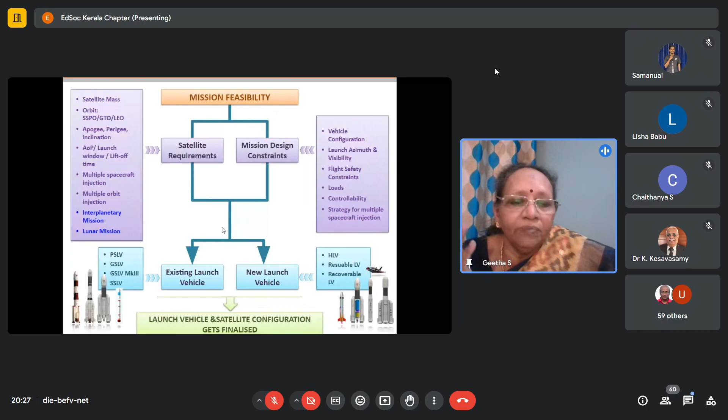In that, the major concern is the satellite mass. So the vehicle mass, satellite mass carrying capacity of the rocket will vary from vehicle to vehicle. That is the vehicle configuration. Then we will decide the launch azimuth and the visibility constraints - from which tracking stations the vehicle is visible, not only along the flying path but also in the orbit.

And also then the flight safety constraints, loads, what are the loads acting on the vehicle, whether the vehicle is controllable in all phases, and whether the strategy for multiple spacecraft injection is capable, that capability is there for the vehicle or not. For example, in the case of PSLV, we have to have PS4 restart capability. Then only we can have...

multiple restart option as well as the multiple orbit mission. In one flight itself, we can have multiple satellites, but if you wanted different orbits, for example, first satellite in an orbit of 650, next satellite in an orbit of 850, then we have to raise the orbit. That capability is due to the last fourth stage restart capability. So with these things into consideration, we'll go to the existing launch vehicle.

On the left side, you can see the existing launch vehicles of ISRO: PSLV, GSLV, Mark III, and SSLV. I am telling all these things with respect to the ISRO launch vehicle. On the right side, you can see HLV, which is coming in the new launch vehicle. Reusable launch vehicle is, at present, not designed to launch the satellite and all. It is an experiment only, and a recoverable launch vehicle. These are all new launch vehicles.

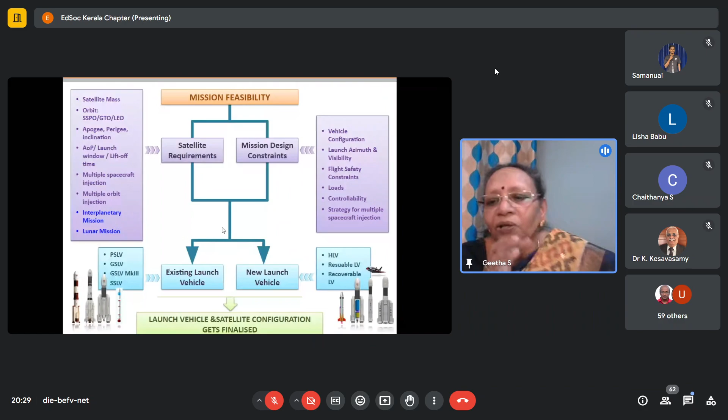This is one of the challenging areas, because suppose the vehicle is big enough, then we will be losing some money because of the cost of the vehicle. For example, for a small satellite, if I am using GSLV or GSLV Mark III, then it won't be cost effective. So cost part and all I am not addressing at all.

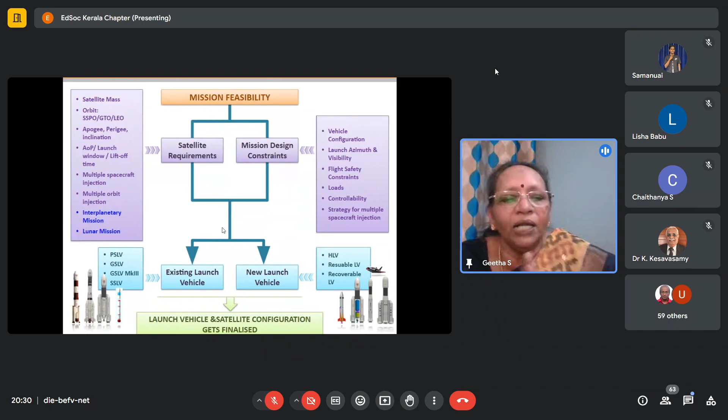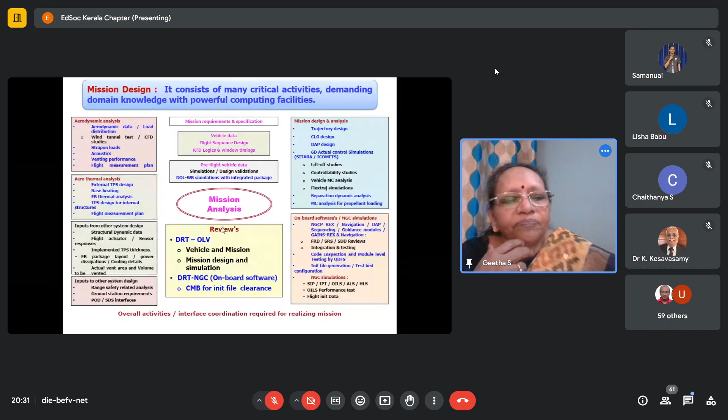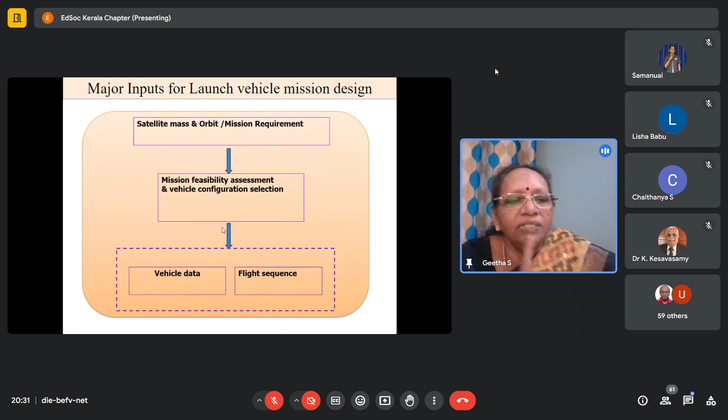So once this vehicle is finalized, satellite is finalized, then we'll go through the vehicle data. Once the feasibility and the configuration selection is over, then for the mission designer, two important points: one is the vehicle data and the next one is the flight sequence.

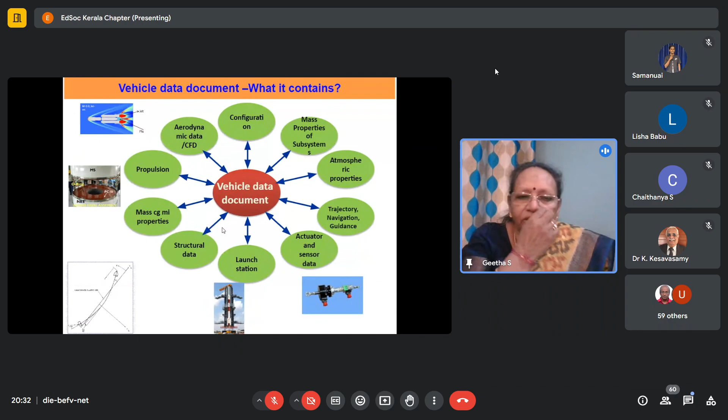So this document is the one which goes to the mission design. It is a huge document. These are the inputs to that document.

Like why I am telling mission constraint is, suppose visibility is there, then all important stage events like stage ignition, stage separations, stage control - all these things should be visible from the visibility stations. If it is not available from our own visibility stations, then we have to hire also.

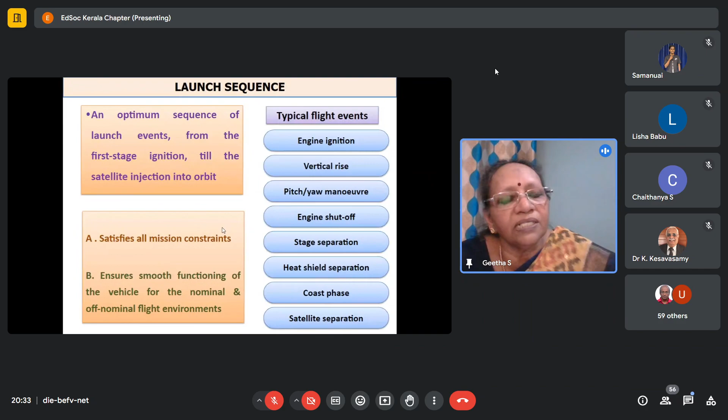Suppose there is a coast phase, no major events, no visibility - then we need not worry about hiring a visibility ground station. Rather, we can store the data. That satisfies all mission constraints. So even though I put it as ignition, cut off and all, visibility is also a major function, and it should ensure smooth functioning of the vehicle for nominal as well as off-nominal flight environments.

So that is another point. Launch sequence must satisfy vehicle and ground subsystem requirements which depend on flight environment. Defining the event sequence in real time onboard is essential to meet all requirements. That is called RTD. When we started with ASLV long back, RTD was not there. After the 2 failures, our study indicated that a real-time decision onboard is required. That is why RTD is implemented from ASLV D3 onwards.

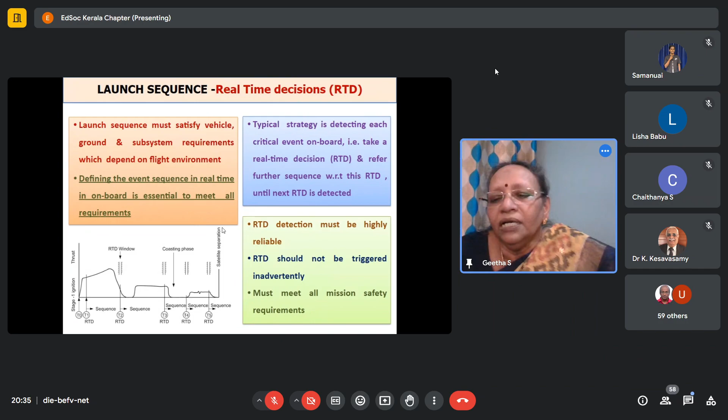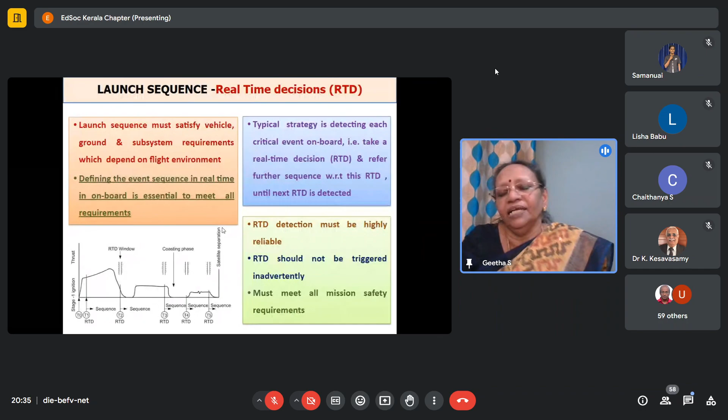So that is a typical strategy - detecting each critical event onboard, taking a real-time decision and referring further sequences with respect to that decision until the next RTD is detected. So RTD detection must be highly reliable. RTD may be based on sensor data, accelerometer data, so that has to be reliable, and RTD should not be triggered inadvertently. If an RTD is triggered inadvertently, that also creates a problem, and at the same time it should meet all mission safety requirements.

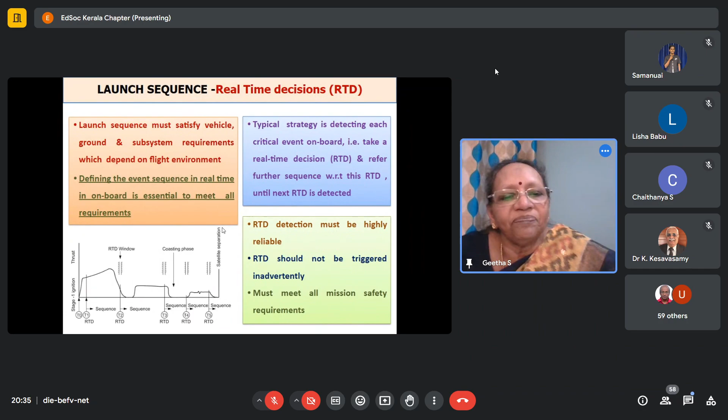So this is a typical sequence. I will not dwell upon that. This is to say a typical mission sequence wherein all separations, acceleration-based RTD, everything is noted for these 3 stages.

Launch sequence - stage transition is a crucial event. There are 2 crucial requirements of stage transition. Stage transition means, as soon as the function of a stage is over, it will be separated from the ongoing stage. That is to increase the acceleration levels, because if you are carrying dead mass, the acceleration will be less, and because of that the velocity will be less. So the upper stages have to have higher capacity - that is why we are separating.

So in a stage transition, since this is a major event in the sequence - first stage to second stage to third stage to fourth stage - it has to be a clean separation. At the same time, whichever stage it may be, it has to be in controllable conditions. So the thrust of the spent stage must be low for clean separation. Solid motors and liquid engines may have large dispersions in action time. Only after separation of the stage can the next stage be ignited. So this is the condition for clean separation.

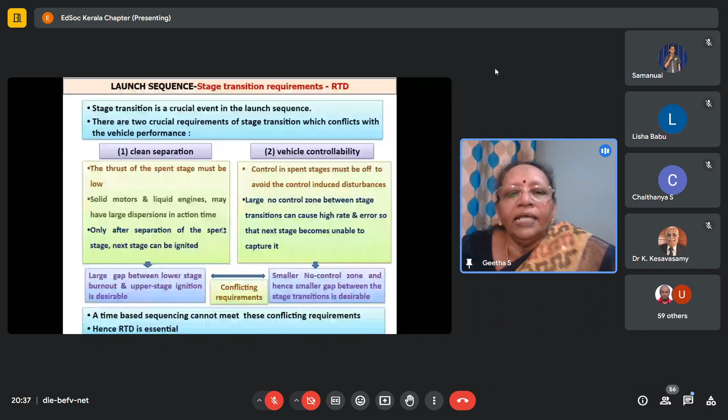The other requirement is control in the spent stages must be off to avoid control-induced disturbances. And a large no-control zone between the stage transitions can cause high rate and error, so that the next stage becomes unable to capture it. So these are conflicting requirements - that is why an RTD is essential.

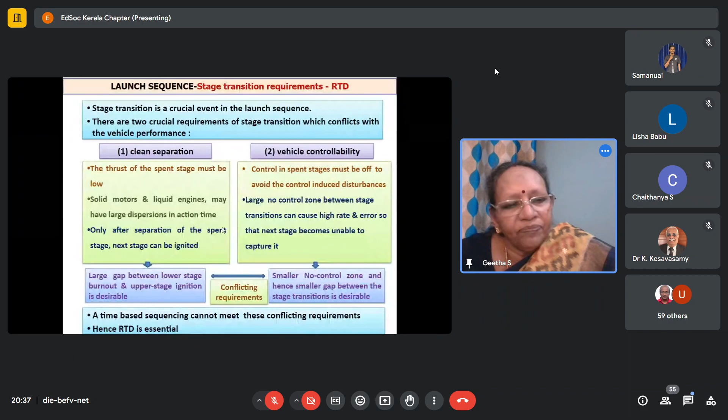So for a mission designer, the major challenge is getting vehicle data which exactly duplicates the vehicle behavior. The next is the sequence of events satisfying all constraints with clean separation and all. After maybe two or three trials, both the vehicle data and the sequence will be evolving. Even for PSLV and others, we are at a stage where no further evolvement is required until there are changes.

So for the mission designer, now you have the vehicle data as well as the sequence. Then what is the challenge? The challenge is first of all the modeling of the vehicle and the satellite - because you work on the model only for the design, so the model has to be accurate with respect to the actual vehicle, then only your design will work. That is the first and foremost challenge in vehicle design - the modeling of the vehicle as well as the satellite. Even though I say vehicle, the satellite is also there - its properties also govern the mass, inertia properties, flexible properties, everywhere.

Then comes the mission aspects like trajectory, navigation, guidance, and control. Below each bubble I have put - for trajectory, it has to be a minimum fuel trajectory, meaning it is an optimum fuel trajectory. Why optimum means?

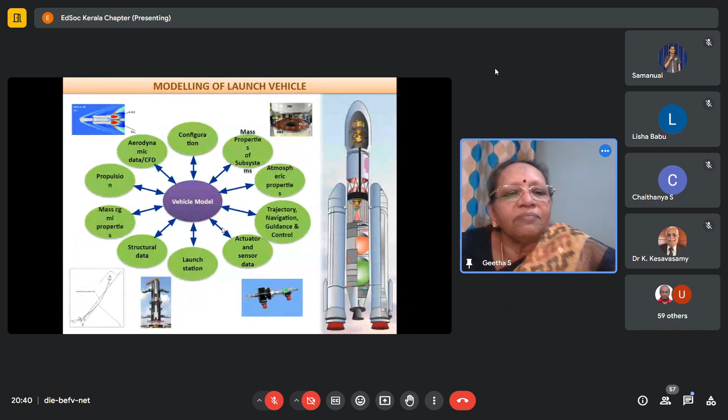Modeling I have already covered.

What is the mission design? In the mission design, as I told, the launch vehicle configuration is finalized. Then how to achieve the mission - that is the defined mission in specifications in terms of orbit and orbital dispersions. And the trajectory to be followed with minimum fuel - that is called the trajectory design. How to ensure impact of jettisoned stages in the safe zone - that is the range safety. And how to ensure safety of the vehicle during atmospheric flight - that is the load reduction or wind biasing. So this is the mission design process.

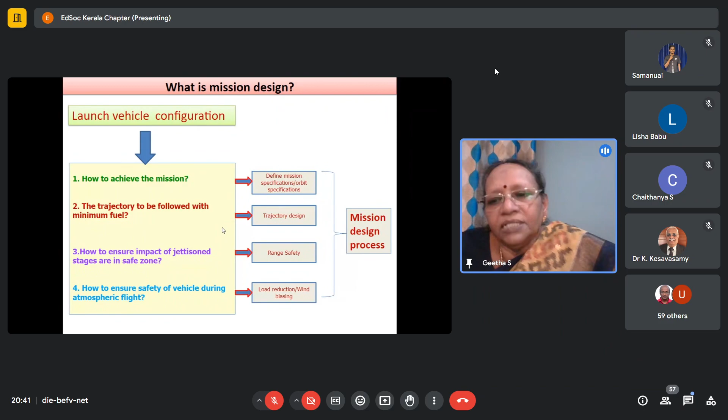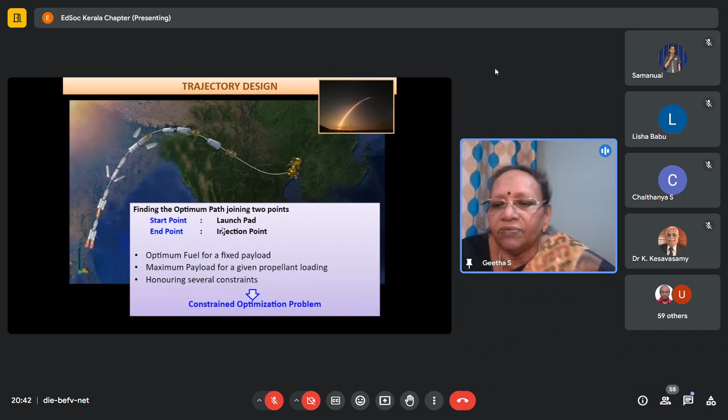This is the optimal trajectory design. This figure is for the Mark 3 vehicle. You can see the start point is the launch pad and the end point is the injection point. The optimum fuel for a fixed payload, or maximum payload for a given propellant loading, honoring several constraints - that is called the constrained optimization problem. Here we will be using the point mass trajectory, and a trajectory which meets our constraints in terms of visibility, range safety, and the orbital constraints. Then we will assume that this is the trajectory given for the guidance design as well as for the autopilot design.

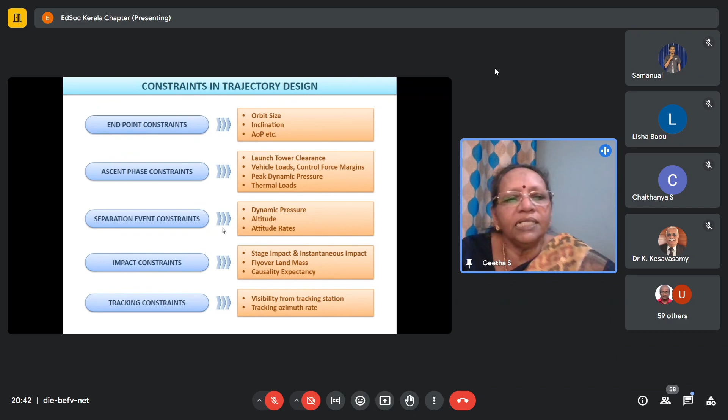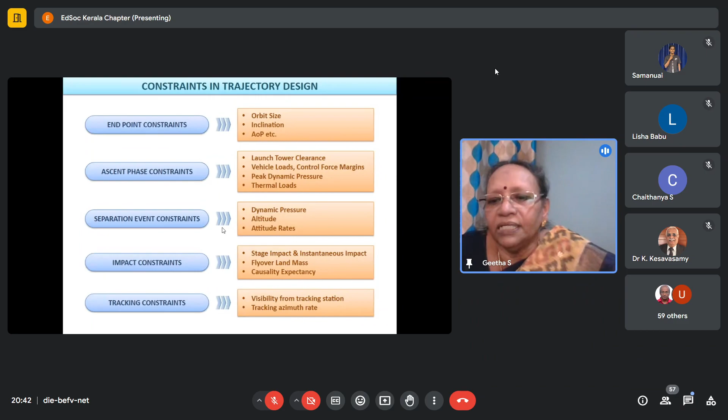This point, in a nutshell, I have covered earlier. Endpoint constraints - what are they? Like orbit size, inclination, argument of perigee, ascent phase constraints, launch tower clearance, peak dynamic pressure, thermal loads, separation event constraints like dynamic pressure, altitude, impact constraints, tracking constraints. All these things will be considered in the optimal trajectory design.

These are the different phases of the trajectory. You can see the first stage, and this is for PSLV - the 4 strap-on separations, 2 strap-on separations. I'm going through from down to up. Then PS1 separation, PS2 ignition, heat shield separation, PS2 separation, and the CLG phase is the closed loop guidance phase.

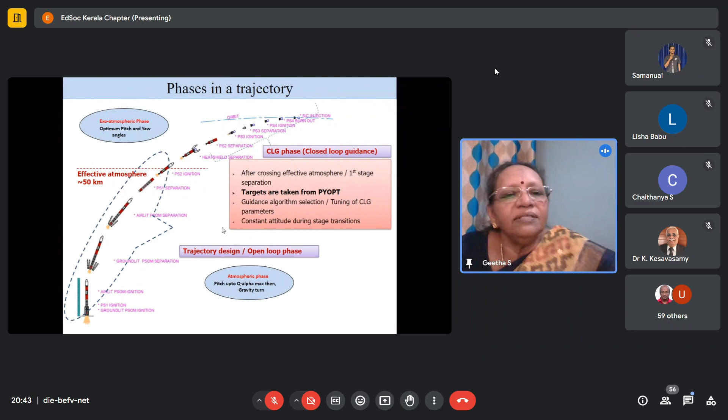That is only if the vehicle is not functioning properly - it has to be destroyed. Before the design phase, even if everything is working, at any point of time if the stage or vehicle - this destruction can happen only up to second stage - so at any point of time, if something happens to the vehicle and it impacts the ground, whether it is a populated area, what is the casualty expectancy - worldwide numbers are there. The impact point casualty expectancy has to be like this. Stage impact point has to be this many nautical miles away from landmass as well as ocean. These constraints are given to the mission designer, and keeping that into consideration, he'll design the trajectory.

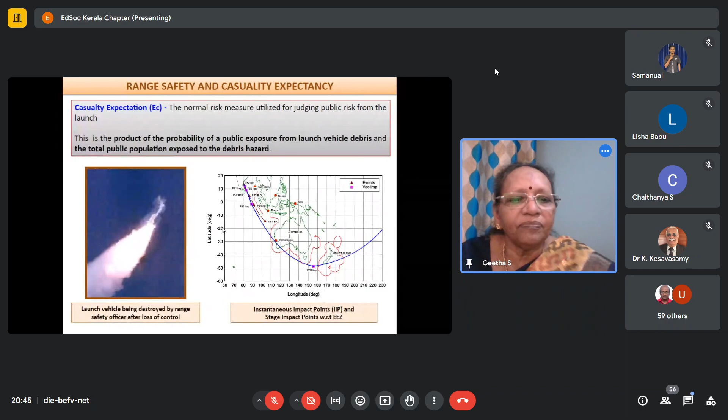Once the trajectory is over, the next point is navigation, guidance, and control. Navigation determines the present state of the vehicle: position, velocity, attitude. Guidance generates the steering commands to reach the desired optimum conditions, like orbital conditions.

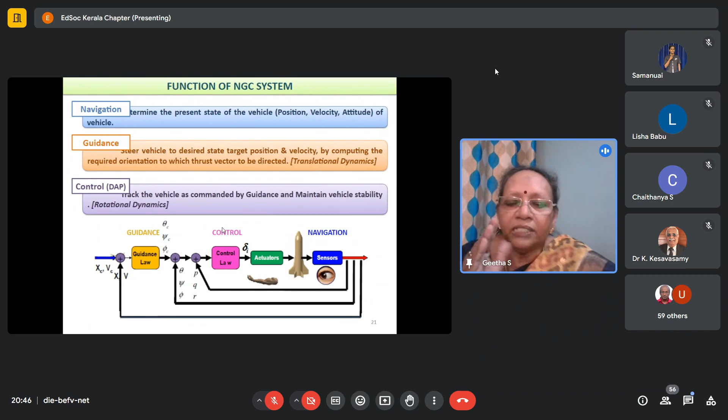In each stage there are targets. Suppose I am in the second stage, we will have the second stage target condition. Suppose I am in the third stage, we have the third stage target condition. So the guidance design has to be carried out to meet the end conditions in that stage, and the control has to follow the steering commands generated by the guidance.

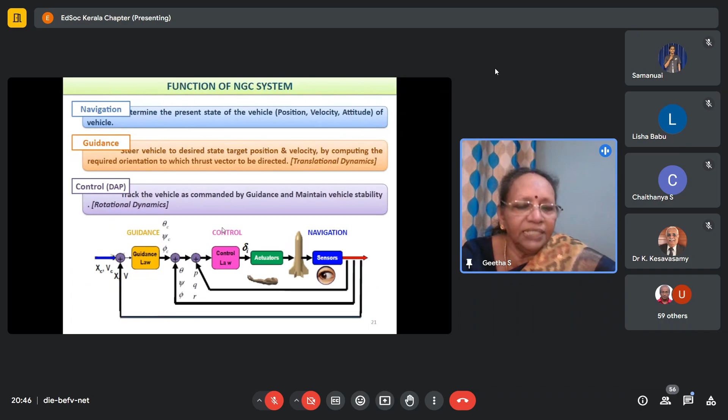So guidance generates the commands, navigation gives you information, and control gives you the steering commands, the actuator commands, required in each stage to meet the steering commands generated by the guidance.

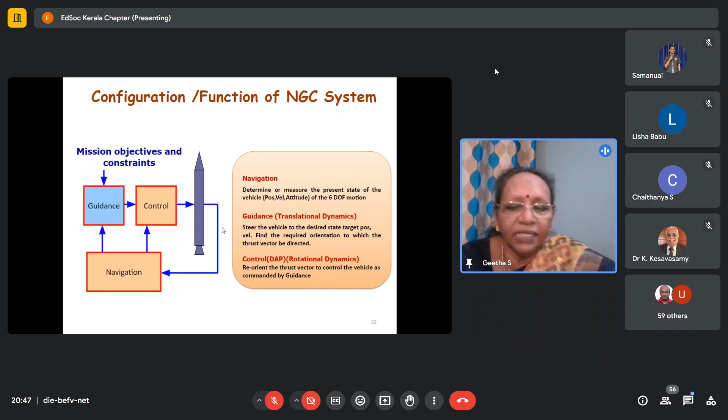I'll skip this because I already told what are the requirements coming from the satellite, whether low Earth orbit, sun synchronous orbit, or geosynchronous orbit. All these are inputs to the mission designer initially, and based on that we do the trajectory design as well as the guidance design.

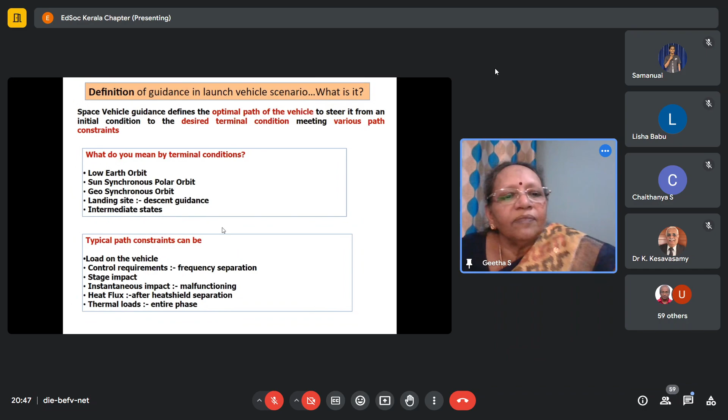In guidance design, the atmospheric phase is open loop and the exo-atmospheric phase is closed loop. In the atmospheric phase there are so many disturbances like wind, atmospheric pressure, atmospheric density and so on. There we give more importance to clearance of the atmosphere without any problem to the vehicle. That's why we use open loop guidance.

You can have closed loop guidance also, no issue. But the effectiveness matters in closed loop guidance. It won't be effective because our prime idea is to have clearance of the atmosphere. So in closed loop guidance, if you are having...

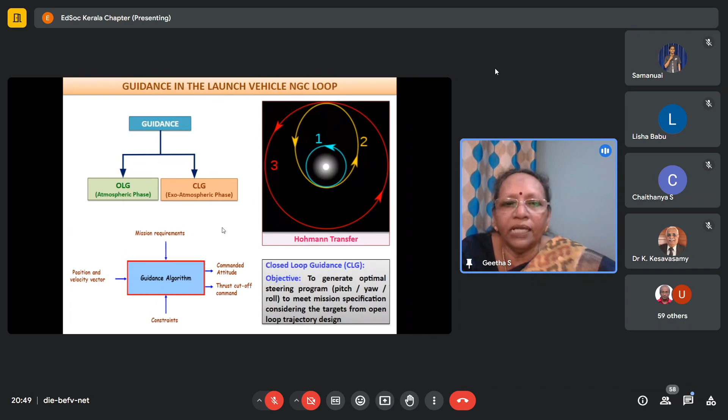From the first orbit, by using the satellite fuel, you can go to the second orbit. But here, after injecting the first satellite in the first orbit, the rest of the vehicle is reignited to reach the second orbit and then the third orbit. So in this case there are two satellites, one in orbit number 1 and another in orbit number 3.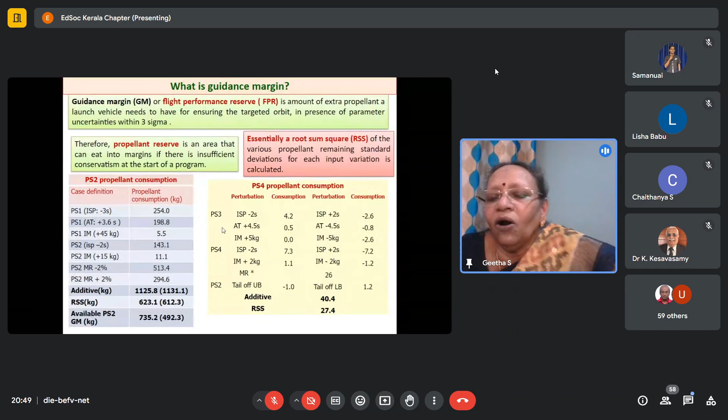I put this slide specifically because later I will be telling about the guidance margin. Guidance margin is the additional fuel we keep in each stage to meet requirements in the eventuality of the performance going off-nominal. So some additional extra fuel has to be stored in each stage.

Usually this additional fuel can be stored only in liquid stages, because in solid stages we cannot store extra fuel. In liquid stages we have the capability to shut down the stage, keeping some fuel in reserve, which we can use for off-nominal performance of the vehicle.

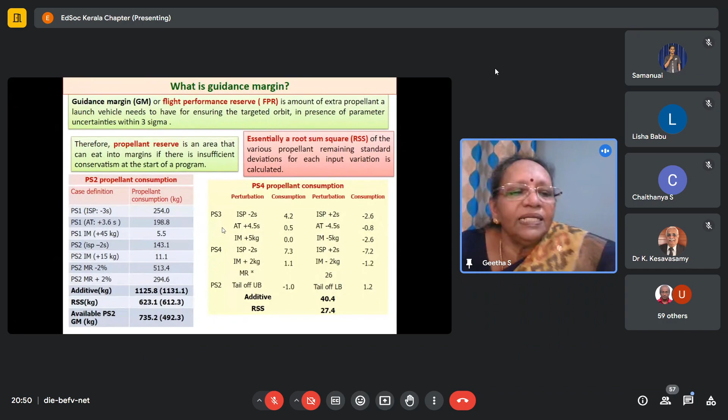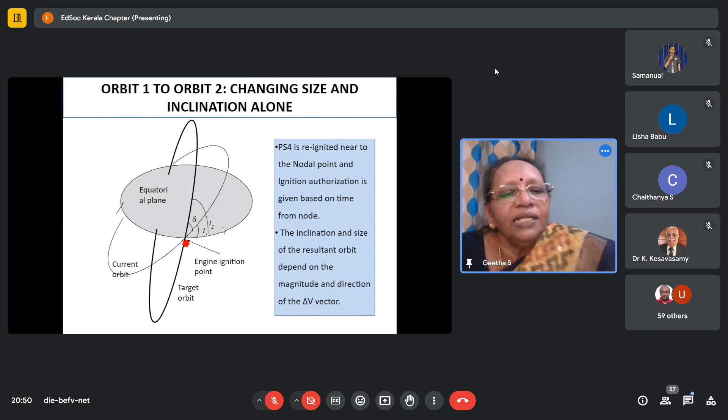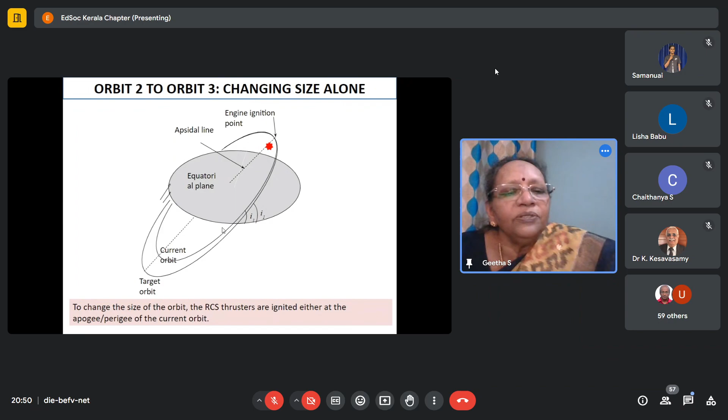This is from orbit 2 to orbit 3. All these come in the guidance part.

In the case of the PSLV C45 mission, we have 3 orbits. First orbit is 748 something, second orbit is 504, orbit 3 is 485. Orbit 1 is achieved with the regular launch vehicle phase. Then the PS4 engine is restarted twice to achieve orbit 2 from orbit 1. And then for orbit 3, we have used the RCS, the small thrusters, for a long time to reach orbit 3.

These stars and all, I have put, when you press enter it will click. That's why I was telling that I am comfortable with my own way of presentation.

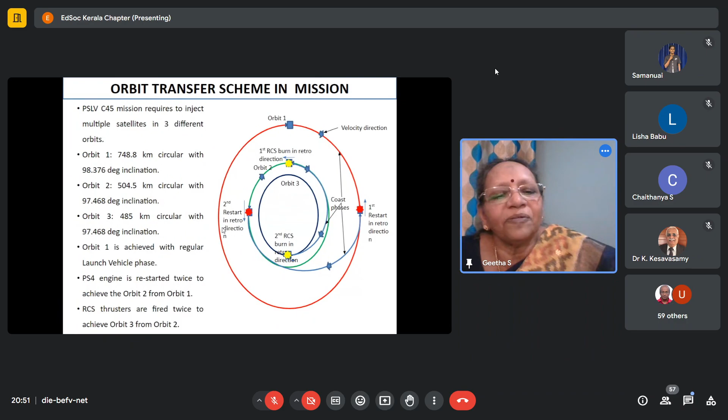Coming to the digital autopilot design, as I told you, the guidance will generate the steering commands in pitch and yaw direction. Almost all our vehicles have pitch and yaw only steering; roll control is not there for the vehicle. There are phases where rolling is required, like spin stabilized vehicles - the ASLV last stage is a spin stabilized vehicle, and some satellites are also spin stabilized.

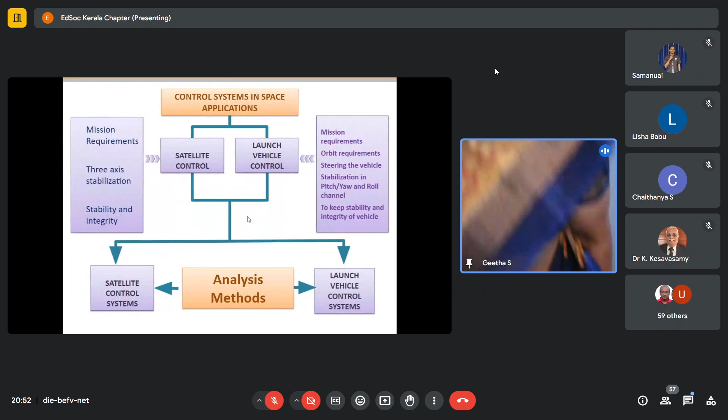Next slide. I think a battery is low coming from your presentation. Somebody who is presenting, you just see your battery is low.

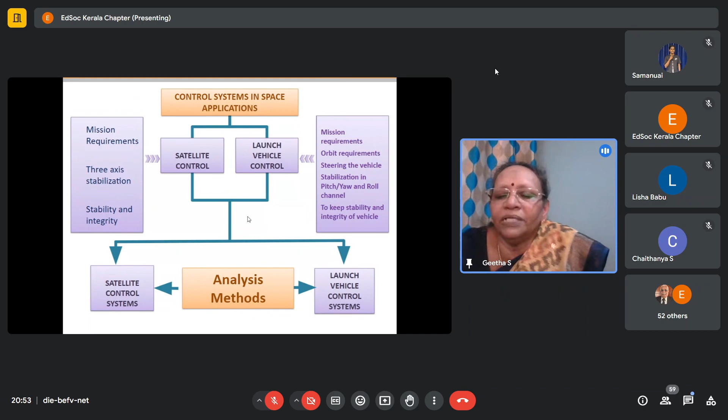This control systems in space applications has two controls: satellite control and launch vehicle control. The mission requirements for launch vehicle already I have covered, and then analysis methods. These analysis methods depend upon the launch vehicle and satellites, which will be different, because the launch vehicle is a huge structure, whereas the satellite is maximum, our satellites contain something like 4,000, less than 4,000 in the case of Chandrayaan 3 also. So the control systems also will be different. Once you are in orbit in the satellite, your control is required only to make it moving in the orbit, no other things.

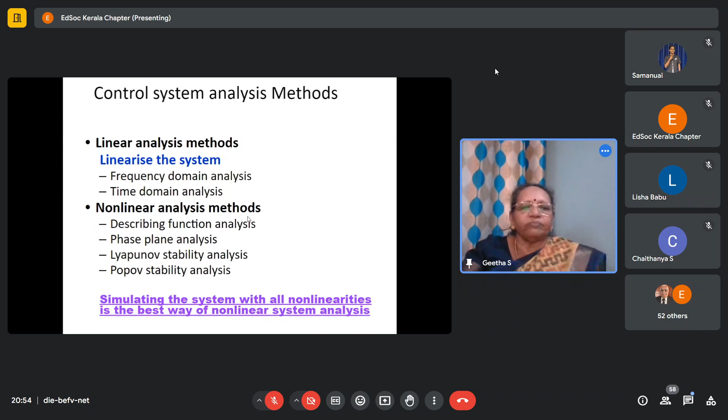This is also already covered - it is a feedback control problem. Delta input is given and the output is the vehicle attitude measurement in presence of disturbances.

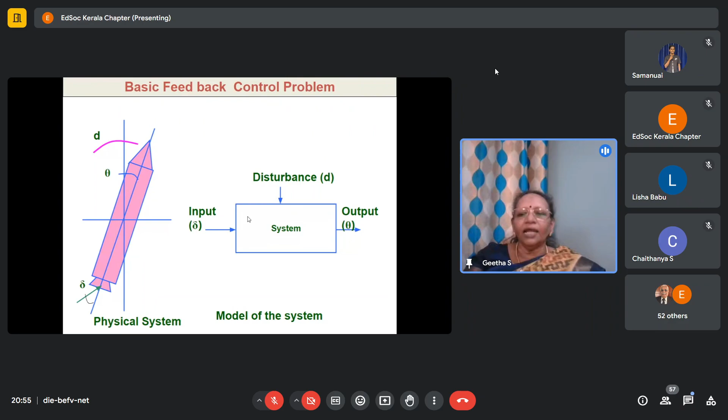So the controller design. After all these things, the controller has to be designed, which should take care of the varying vehicle properties - like when the propellant is consuming, the mass and CG properties will be varying, so each time the vehicle will be different. For that to work, what are the forward and feedback gains required in the rigid body? Rigid body means wherever the total vehicle is acting as a rigid condition - if you draw a line between two points during the entire phase of flight, the distance between those two points will not vary. Flexible means like a rubber band motion - it won't be exactly like a rubber band motion, but in flexibility we will be putting the vehicle in terms of flexible modes, like bending modes, which comes from the structural data.

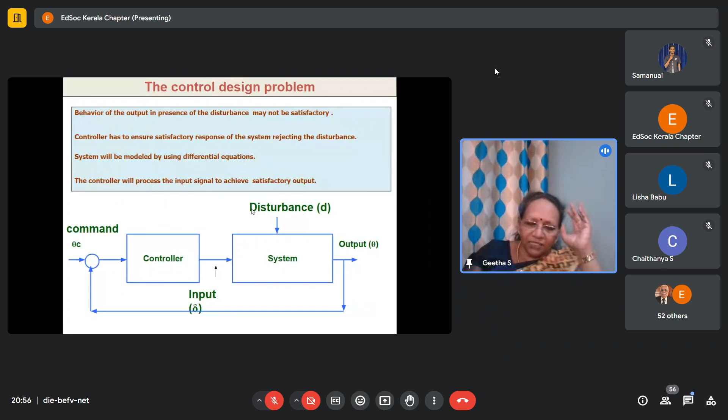With all these things, the controller has to be designed to take care of varying CG, moment of inertia properties of the vehicle, varying thrust of the vehicle, as well as the bending modes of the vehicle. If it is a stage with liquid engines and liquid tanks, then slosh properties also have to be considered.

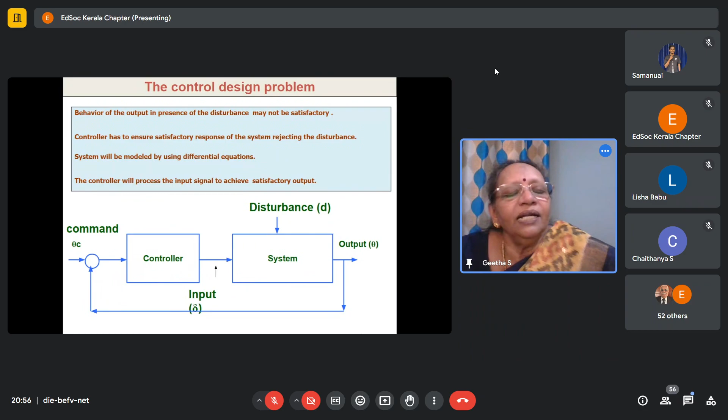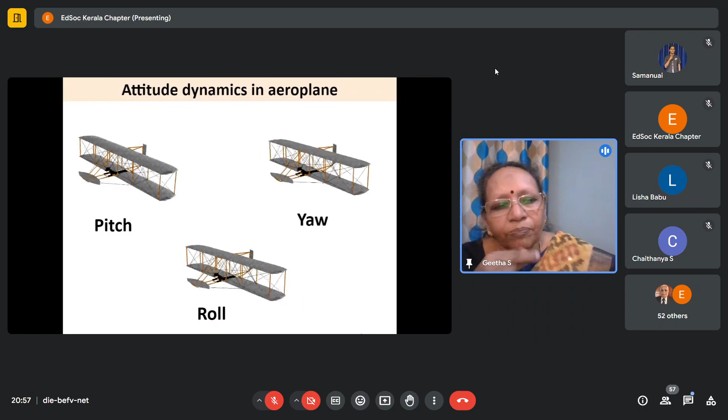Next slide - to have an idea of what is pitch motion, yaw motion and roll motion: pitch motion is vehicle up and down motion, yaw motion is like this, roll is as you know for any vehicle roll. In the rocket motion, pitch motion is very difficult to show, that is why I have put it as an aircraft.

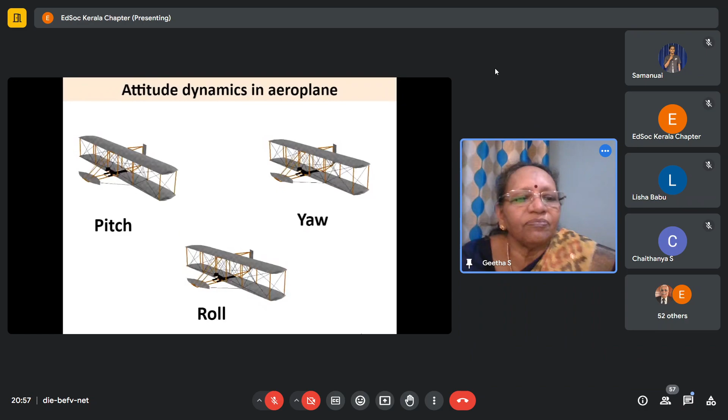Next slide. This is the pitch motion and roll motion. It cannot be shown like this for the rocket, that's why I have put it in the aircraft point of view.

So this is what I was telling about the bending modes. You can see the vehicle on the leftmost side and the bended diagrams of the vehicle with different modes, first mode, second mode and third mode. This is called flexibility. Slosh is happening for the vehicle which is having liquid tanks, and engine and actuator dynamics also has to be considered in the vehicle model.

In the original model, that model contains all these vehicle slosh effects, bending mode effects and all. And when you are doing the design for the GSLV first stage vehicle mode, you might have studied, being BTech, the state space representation of the vehicle, of the system. The order of the system is around 50th order, 50, 52 is the order size when we are designing the controller for the first stage of the GSLV rocket.

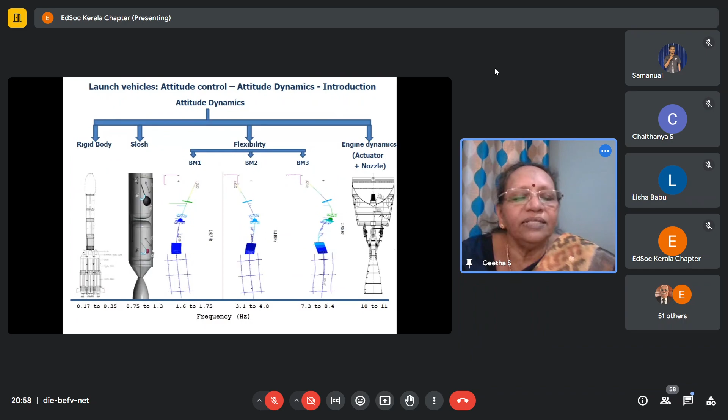These things I have already covered.

Electronics students might have studied about the Nyquist plot, I don't know. For the analysis, our major tool is the Nyquist plot. You might have seen the Bode plot too, first year or second year beginning. So the Nyquist plot shows the magnitude and phase with respect to frequency at any point of time. All these slosh modes or flexible modes are with respect to frequency only, so all our analysis is with respect to the frequency domain.

Finally, we will check with the time response analysis with all nonlinearities into the system in place, like dead zone nonlinearity, saturation nonlinearity, slew rate, what is the vehicle maximum actuator speed it can go to. All nonlinearities will be put in the simulation and we will assess the responses.

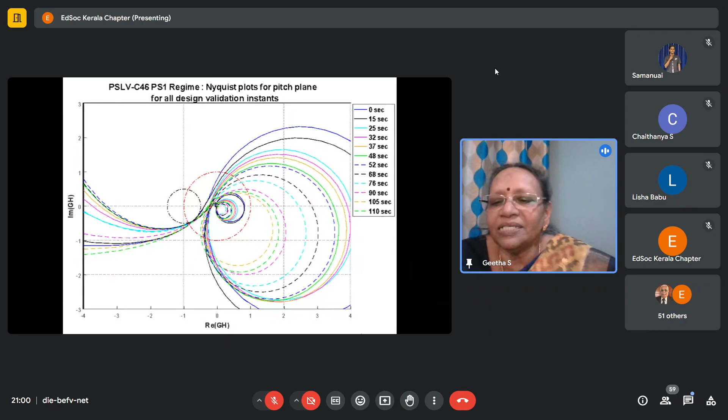You can see a small circle with the black, that is the region where it should not go. That is dictated by margins like gain margin, phase margin, aero margin, etc. And these modes which you are seeing on the right hand side are phase stabilized modes. I am not addressing phase stabilization and gain stabilization in detail, it will not be relevant to you.

Only thing is you have to see that all the vehicle modes, in terms of slosh or flexibility, has to be stable in flight. For that, a control designer has to do certain things.

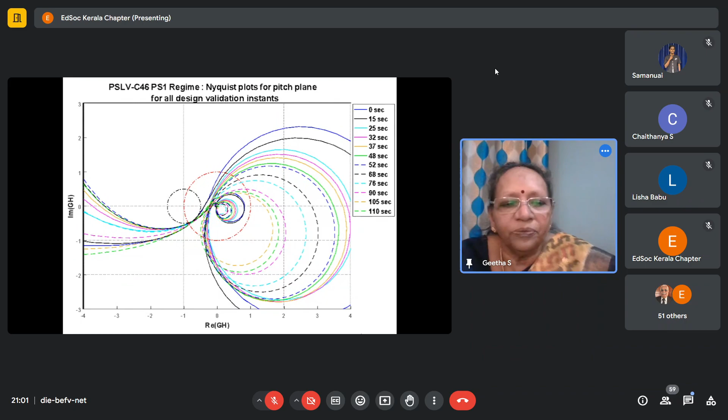So finally, autopilot design will consist of forward and feedback gains, a time varying gain, and then the integrator to reduce the tracking error, filters to stabilize the flexibility and slosh and attenuate the high frequency noise. All these things have to come in the design, in the autopilot design.

Here you can see, on the left hand side bottom corner, a lag lead to start with. This is frequency versus magnitude in the top plot, frequency versus phase in the bottom plot. You can see notch filters, two notch filters that I have marked as 3.56 and 9.3, those are their notch frequencies. And the first one, that is the lag lead.

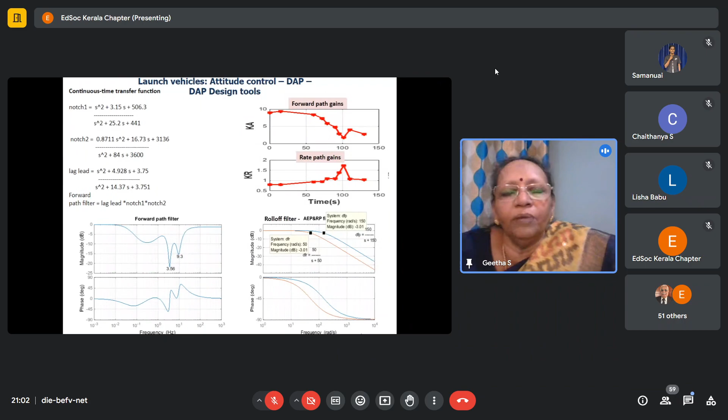The top red plot you can see is the time varying forward and feedback gains. And bottom right side corner, you can see roll off filters. So this entire thing will get into the onboard computer for the autopilot. Similarly, for the guidance also, a set of numbers will be there.

So here I have put a step response to show, on the right side, that red one is an unstable bending mode. That is why it is oscillating and going unstable, whereas you can see the rigid body is stable. So once you have all the filters in place with the correct design, you will have a response like the bottom, green one.

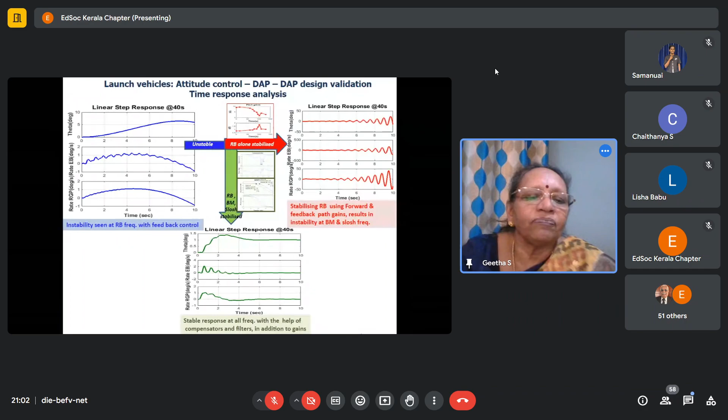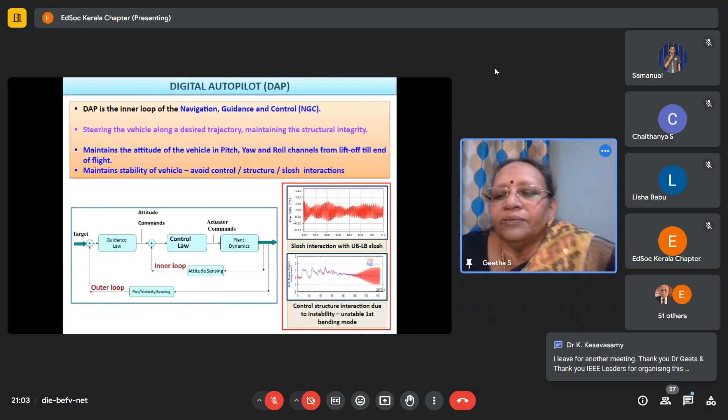So this top one is the control slosh interaction, and the bottom one is the control structure interaction. It is an unstable mode, the red one. In the inner plot you can see a small signal where it is a stable one. If the filter design would have been proper, it will behave like a stable response.

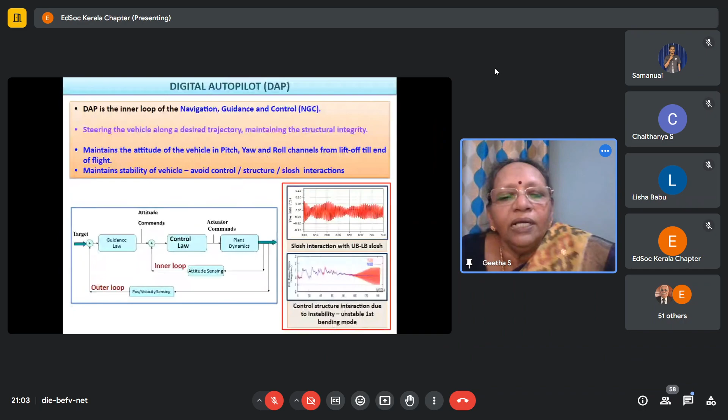Sometimes I may take some 15 minutes more. Is it a problem?

Okay. You can see this. Anantha Krishnan?

This plot also shows a stable one. What I have already shown in your Nyquist plot is the area wherein you should not enter, that black circle. When it enters, the figure will be like this top, that oscillatory red one, which is showing a divergence. When your design is proper, like a blue circle, the behavior will be like this.

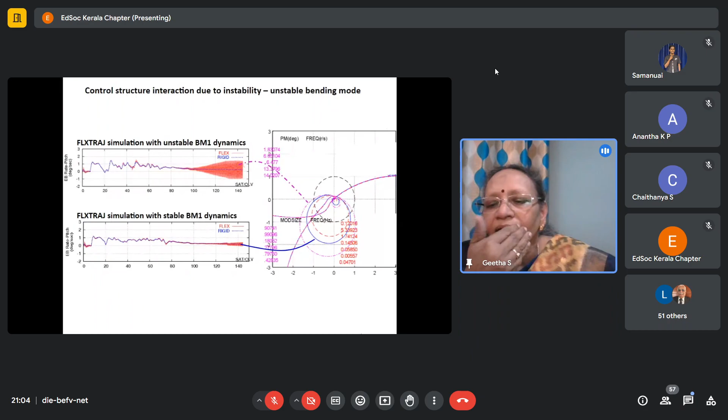What is the problem with divergence? Divergence means it will go to a higher angle of attack, and Q alpha, which is a measure of the strength of the vehicle, will increase and the vehicle will break. That is why flexible control structure interaction has to be avoided.

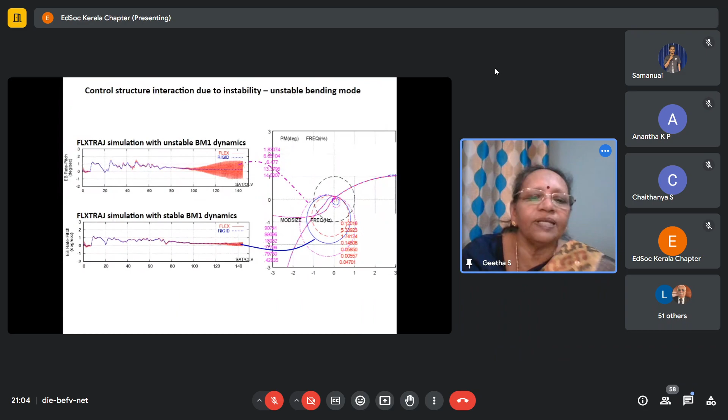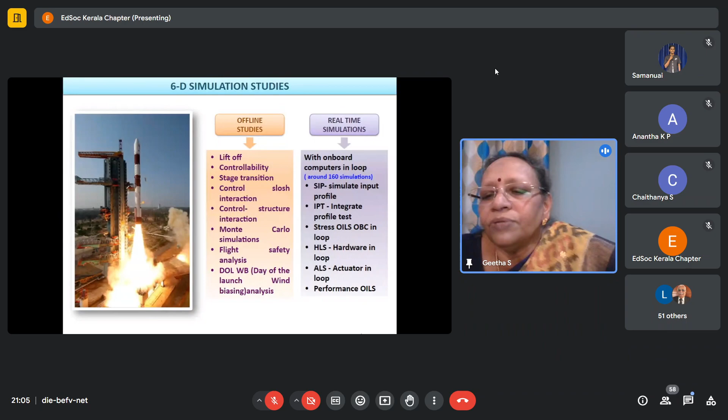That is why I have put OILS, OBC in loop simulations, and HILS, hardware in loop simulation, wherein the actual sensors except the accelerometers will be there. Then the performance OILS and actuator in loop simulations.

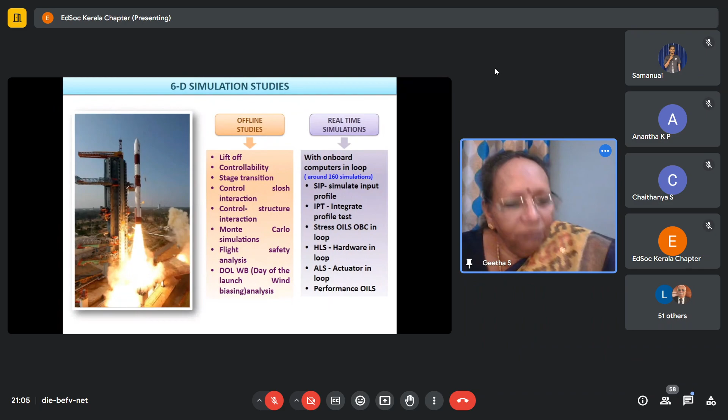Next slide. What is a 6D trajectory simulation? Once the mission specification is finalized, we do the mission design for the above specification.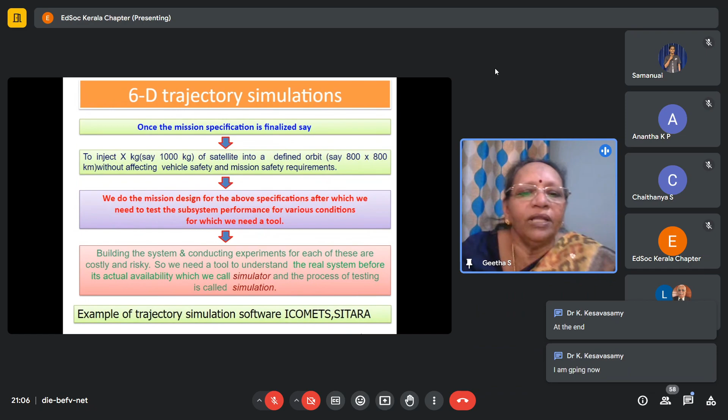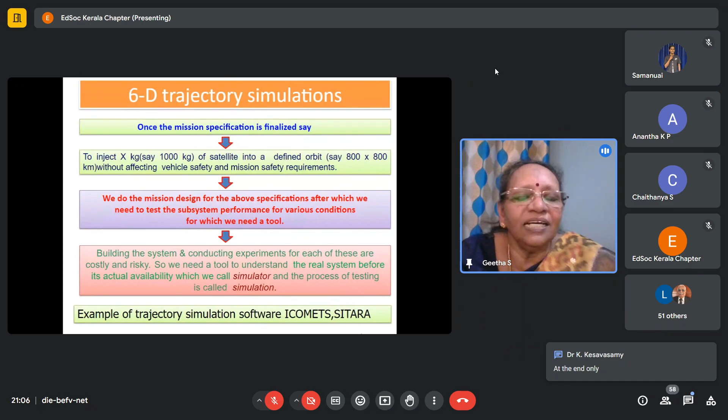Yeah, sir is telling that opportunities for fresh engineers, that after the presentation I will touch upon. So building the system and conducting the experiments for each of these are costly, and we will go for a trajectory. Yeah, sir is telling that sir is going because of the, okay. Okay then. Thank you, sir. Okay, so this is the trajectory simulation. Next slide. I'll be going fast. So once the NGC design is over, Sorry, madam. You can take your own time. Because of the other meeting only I am going. Otherwise, I would have continued till the end. There is no hurry. okay, sir. It's Okay. important for the students. Okay, sir. Thank you. Thank you, sir. All the best. I loved your presentation.

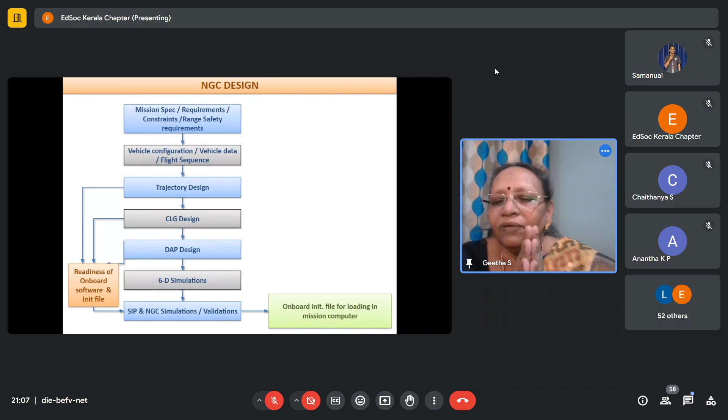So trajectory design is there, CLG design I have told, DAP design, and then it goes to the 6D simulation. So all these designs will turn into a set of numbers and a program. This program as well as the numbers—the numbers are called the init data or initialization data, which goes into the computer. The program is also in the onboard computer. Once it lifts off from the ground, everything is taken care of by the onboard computer. So this is the NGC design in a nutshell. Sometimes it may be an iterative process also.

Next slide please. This Monte Carlo analysis—our design is done with all variations on the plus 3 sigma side or minus 3 sigma side. Sometimes the mission is not achievable, to be frank, with cost-effective constraints and all. Then we will go for a Monte Carlo; even otherwise, Monte Carlo analysis we will do. So all these parameters, something like hundreds of parameters, will be varying within the allowable limits. And then we will do n number of simulations, like thousands or 2000 simulations, and we assess the degree of results going into the orbit.

Suppose one case in thousands or 2000 is not meeting the orbit, we cannot say that the mission will not survive. That particular case alone we will analyze, and suppose that case shows a separation disturbance of 10 degrees per second, we will check whether such 10 degrees per second will come into flight. With that scenario, we will clear the flight. So that is the importance of Monte Carlo simulations.

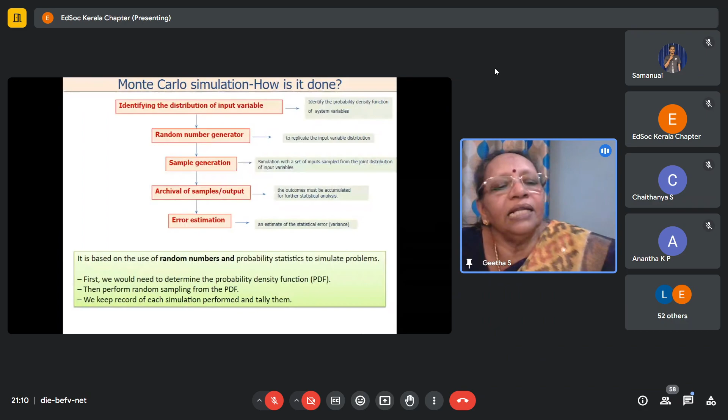So this is identifying the distribution of the input variable, random generation, sample generation, and finally the error estimation.

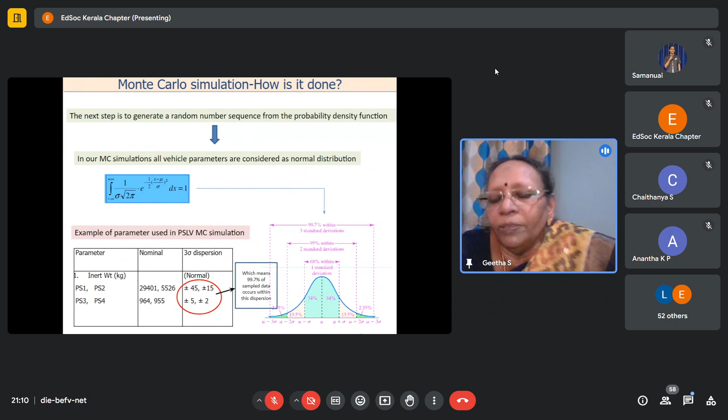So you can see the simple parameter I have put, the variation with respect to the inert weight of PS1, PS2, PS3 and PS4. PS1 is the first stage, PS2 is PS2 and above, PS3 is PS3 and above, PS4 is the fourth stage. In the Monte Carlo sense, all the parameters are varied, and we find out the probability of the output, orbits, orbital dispersions, etc.

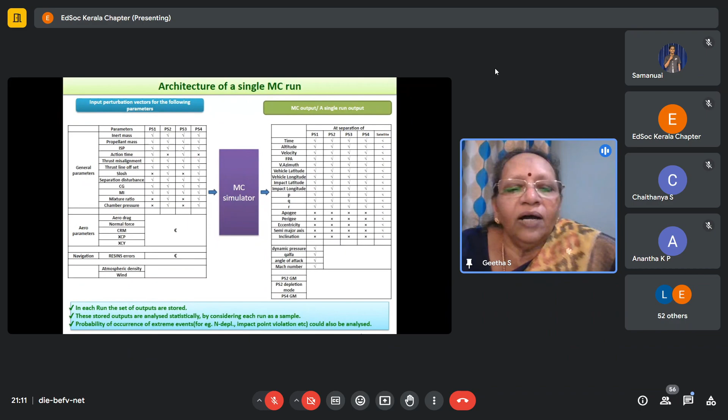This also covers the architecture of a single Monte Carlo run. In each run, the set of outputs are stored, and these stored outputs are analyzed statistically by considering each run as a sample, and the probability of occurrence of extreme events like impact point violation, N-depletion, etc. also has to be analyzed. You can see on the right side the MC simulator output. At separation, what are the conditions? Everything is marked.

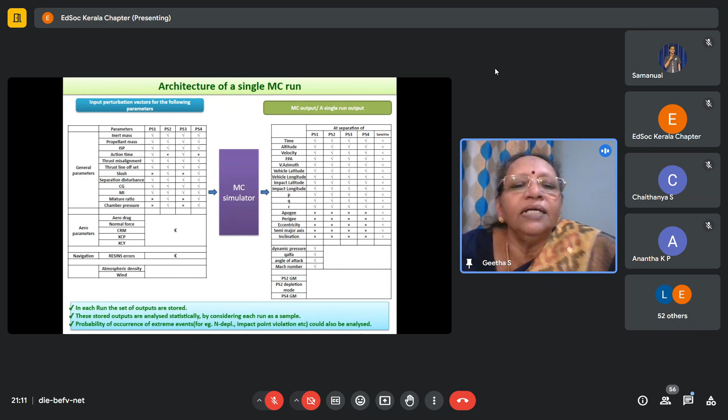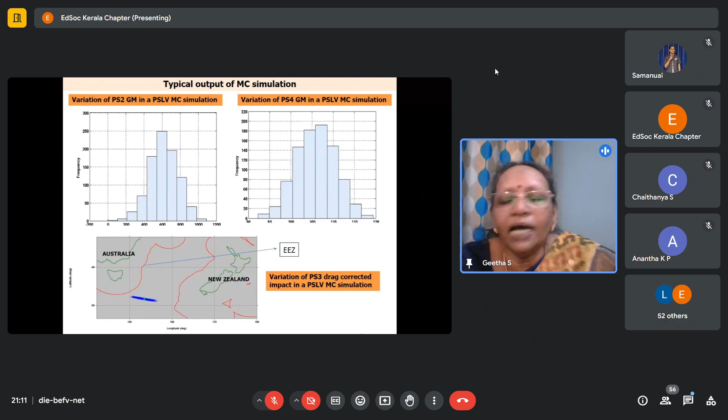This wind biasing technique, which we use in the first stage, means that if you are in a position to go against the wind, you will be in trouble. The alpha tracking error will increase, Q alpha will increase. So for such small time, we go along with the wind with some penalty on the velocity. When going along with the wind, you will not be in an optimal condition, but satisfying that condition is important because vehicle stability is important.

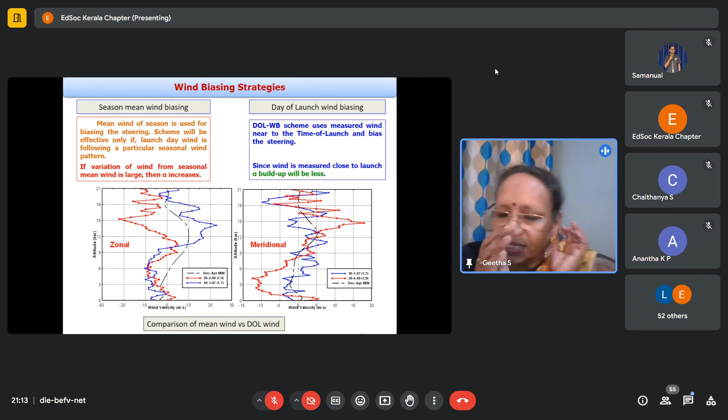For that, we use the wind biasing technique, like mean wind biasing on the SLV, PSLV initially, and then we moved to day-of-the-launch wind biasing. On the day of launching, we measure the wind at T minus 2.5 hours by sending balloons, get the wind data, and compute the trajectory for the first stage for the designed wind. That portion of the trajectory, the theta IC, will be merged with the upper stage trajectory. The upper stage will not change. That is what I call the day of the launch wind biasing.

You can see the winds changing in two fashions, zonal and meridional. The black one is the mean wind of that month. On the day, the winds are very much different from the mean winds. So if you go with mean wind biasing, it won't work. That is why we go for the day of the launch wind biasing.

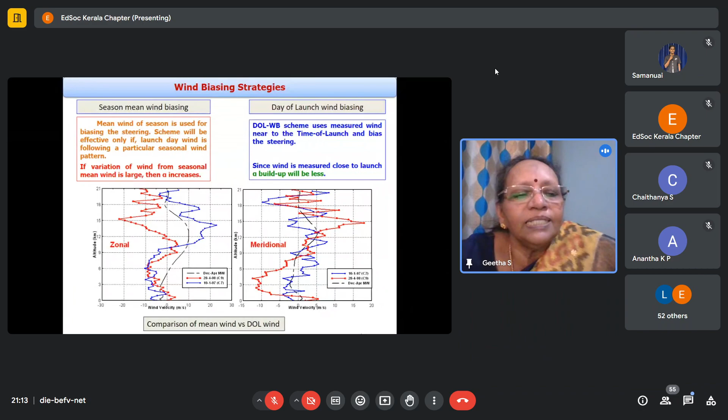Next slide, please. This one you can skip.

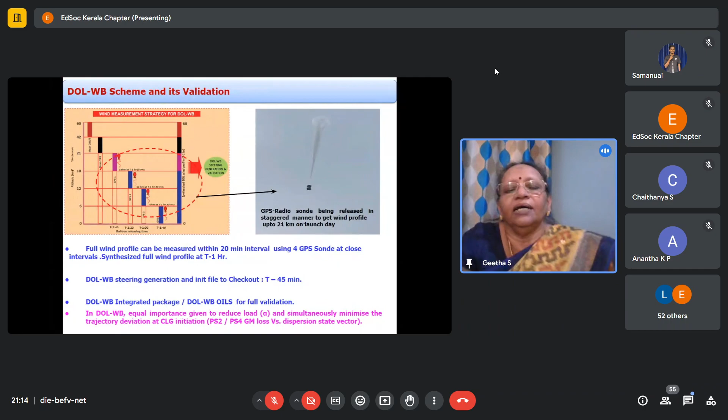These are the balloons we raise on the day to get the information, and the final trajectory data is loaded at T minus 1 hour, and then at T minus 45 minutes the initialization will be loaded. Before that, you have to consider the wind on the day and simulate all cases, including the Monte Carlo analysis, and ensure that the orbital conditions are met and vehicle stability and integrity is ensured.

This also shows the balloon releases and so on. It's not required, you can go to the next slide.

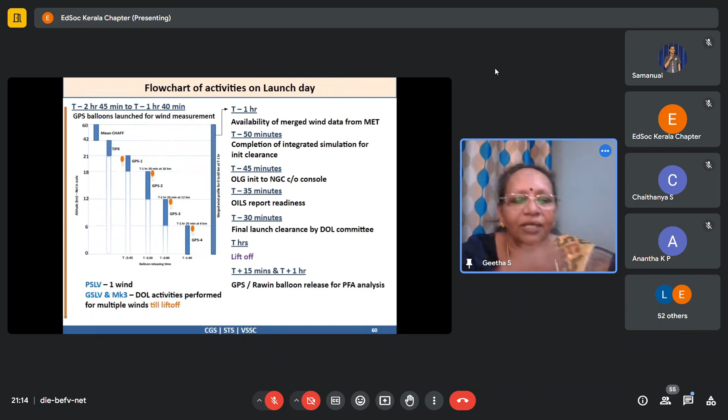So this covers my presentation in the sense of being able to do the design aspects: how do you design a launch vehicle, what are the important points to be considered, and in what areas you should have expertise.

So with respect to sir's request, I will talk about the opportunities in ISRO. For example, if you are a BTech engineering graduate in electrical, electronics, computer science, mechanical, or any graduate from a recognized university, no doubt CET or our colleges in Trivandrum, no issue.